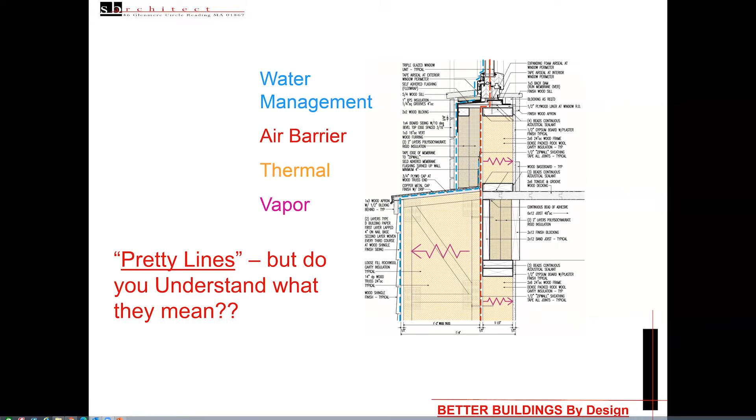You know, this is it. Sometimes there's slides. This one here is, I call it the slider section. It's basically multiple. I use it to have conversations with builders, homeowners, etc. It's a wall section that can be any one of probably 30 different wall sections. It all depends on the different sizes of the framing member, the relationship of permeable cavity insulation to impermeable cavity insulation to exterior rigid insulation.

So this one isn't so much a construction document as it is a learning tool to have that conversation with a builder or with a homeowner to help them get an understanding of where we are, where we want to go, what are our goals here, and more so, how do we make educated decisions about the wall?

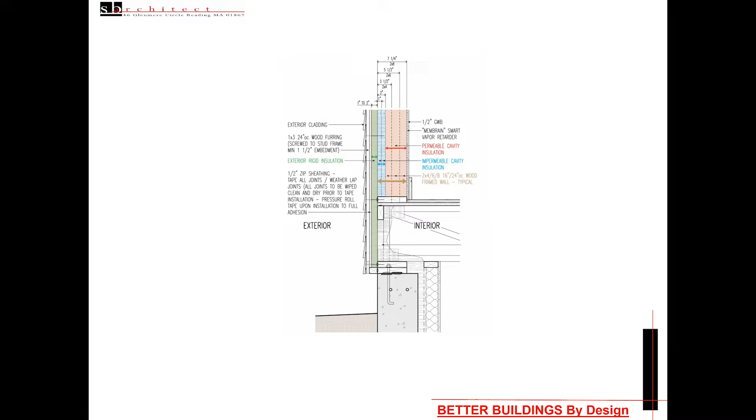A lot of us do remodeling work, right? Whenever I do remodeling work, I never just show where we're going. I think it's extremely important to show where we've been so that we have that mix of old and new and put them together so that people have a really clear understanding of what are we doing here and how are we enhancing or renovating that older version.

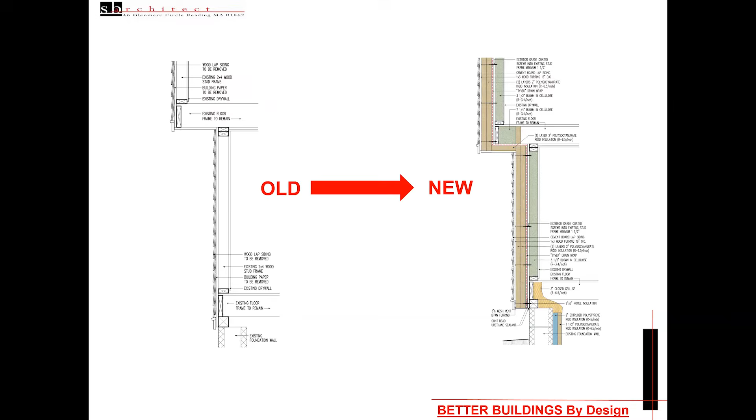When I do construction drawings, it's not uncommon sometimes when the details get too muddy for me to draw what I call a set of twins. And these are exactly the same detail. They're exactly the same project, same roof eave, exactly same condition. It's just on the left, I have what I call the air sealing detail, or the detail that takes everything through the framing stage. And the detail on the right is everything that comes after the framing stage.

So it's really important that the framer gets all the beads of sealant, where the air barrier is, if in fact that's part of the framing scope. But the framer doesn't need to know what the beaded soffit is or the fascia condition or the metal roof. That's stuff that comes after him. So I want him, or her, to be able to concentrate on their scope of work.

And so a lot of times I'll have that detail, and this isn't two details drawn, it's just layer manipulation and freezing different layers so that we get a certain amount of information for this detail, a certain amount of information for the next detail.

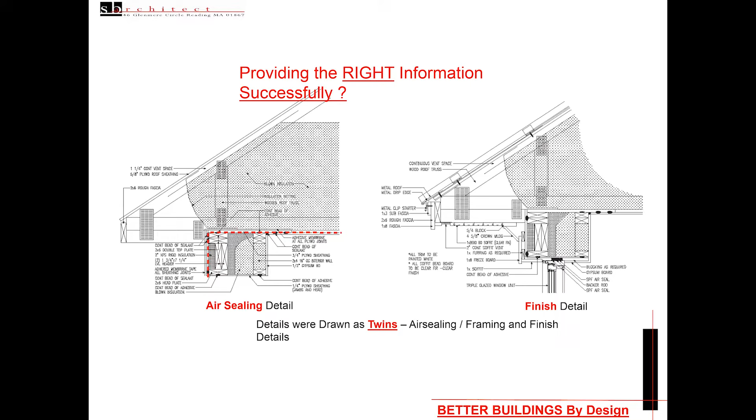And then lastly, this is one that I just did. This is a project. It's a very large house on the coast. I have an inset there of just a really small section of the foundation plan. The footprint was probably close to about 3,500 square feet. But the thing about this house is the elevation had a lot of different wall elevations. It had different door openings. It had grade lines that we had to meet. It had certain footing elevations.

And you can see in the inset here, all of that stuff is in here. I have top of wall, top of footing, all of it, where the step in the footing is. But it's really easy to overlook some of that information. And when you're building a house of this scope, I actually built the foundation in SketchUp. And then I put all of the dimensions.

So you have all the dimensions of different things happening, like grade to top of foundation wall. All the blue elevations mark either the top of the wall, top of footing, bottom of footing. The numbers in green delineate what the grade elevation is at any of the corners. And so I call these a foundation cheat sheet. And the builder was extremely happy to get these.

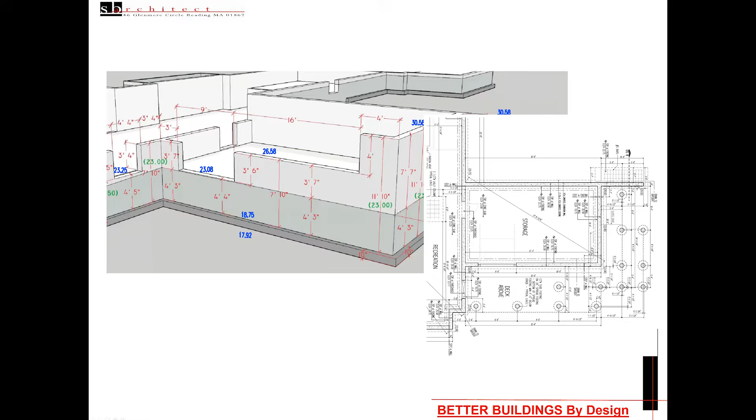Okay, so I kind of took the process through, going more in general through the whole process and the details that I want to convey on the job site. One of the things that I always told my clients is that the plans are not drawn for them, even though they pay me, but it's basically more for the subs. They're the ones who need to understand how to build a house. To me, that is just critical. Also, I've always said that if the critical details to frame a house or to build a house are not on the drawings, the chances of doing it right are greatly diminished.

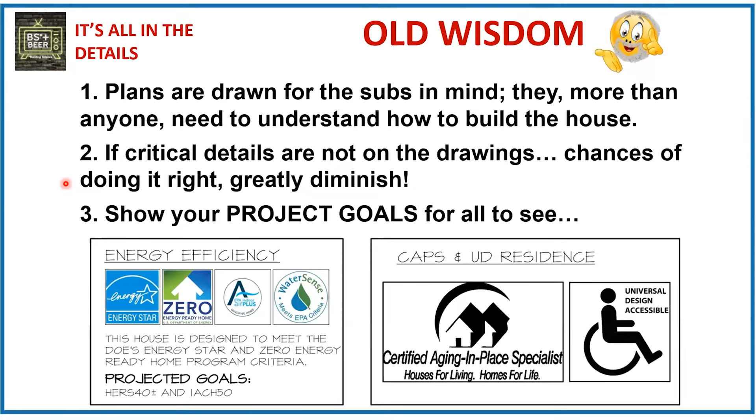And I like to show my project goals on the first page of the plans, because that way it puts everybody on notice. This is what we're trying to do. This is what we want to do. One of the things that really bothers me a lot in our industry is that people don't have a clue about codes. I've already ordered my 21 code, I think it's in the mail, but I've seen the presentations that ICC's done, and there's quite a bit of changes. So for those people that don't know what's coming, there's quite a bit of changes happening in the building envelope and the mandatory requirements.

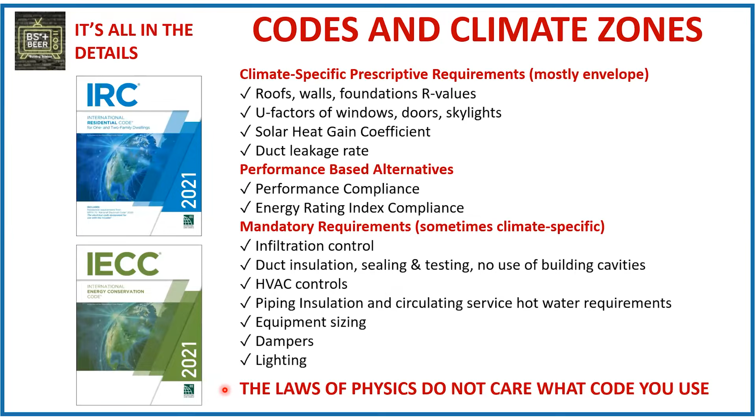The one thing that I've always complained about the codes is that the laws of physics do not care what code you use. And unfortunately, a lot of people use the performance codes to cheat. This was something that I learned from Joe 25 years ago and never forgot. I design homes in climate zones 2 to 5. I believe that if we're going to call ourselves professionals, we need to know how to do dew point analysis on all our projects. You can use ASHRAE fundamentals, which is pretty simple. This is an Excel sheet that I created many years ago, and I use it. But you can also use DOE's program. You can use WUFI.

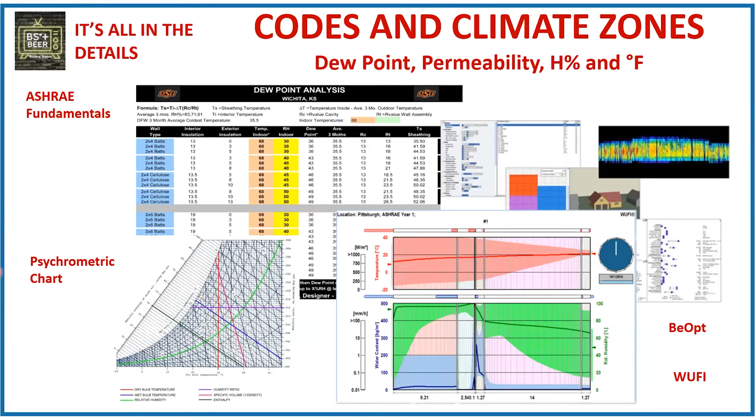At the end of the day, people don't understand that even the codes tell us, look at chapter 7 or chapter 8, and it'll tell you how much insulation you need to use. Well, it doesn't tell you that the house settings may be at a higher temperature or higher humidity. So you're kind of screwed if you're not designing prepared for that. Here in Texas, it tells us to base our work on a temperature of 68 degrees in the wintertime. But most houses that I go to, people have their temperature in the wintertime at 72 or 74. I'm sure that happens in many other areas. So people really need to know that.

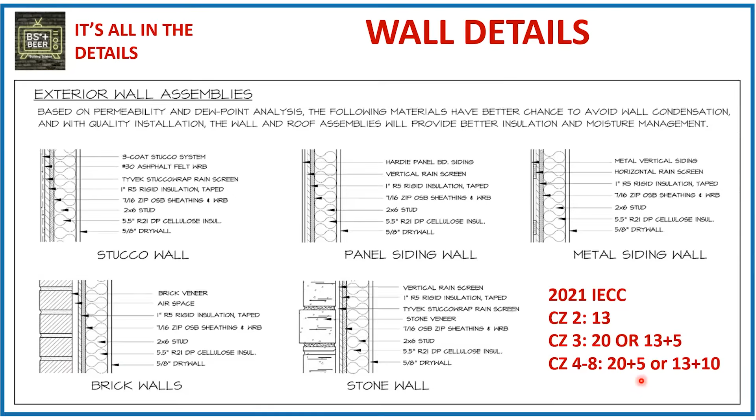Based on that, for every single house, I put a detail of each wall assembly. This is a typical wall assembly I do in climate zone 3, which is more than what is really required in our climate zone. But I know that every 7 or 8 years, we're going to have climate like what we have today for a week or two, where our temperatures are below freezing. So I'd rather protect my clients through that. And in climate zones 4 to 8, they've now improved the code, especially in 4 and 5. Same thing goes for the roof assemblies.

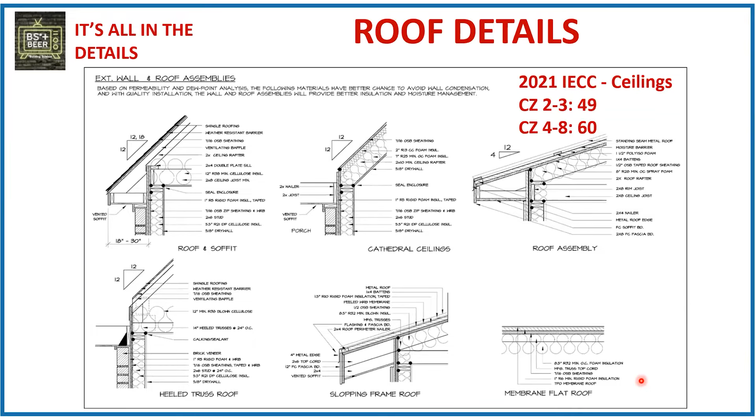And for us, R49 is going to be a step up, because there's still people doing R20. As you guys well know, many people are using the performance code to put 5 inches of open cell foam on a conditioned attic, and that is going to be way below code, 40%. I don't think I want to risk my clients with that type of performance.

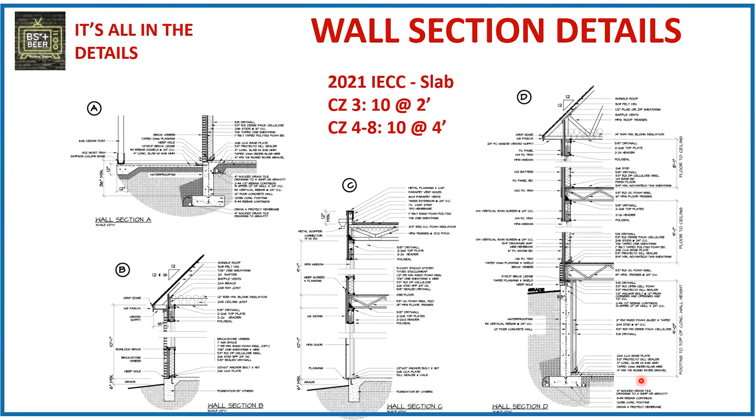And then same thing, it goes to foundations. We don't do a lot of basements here in Texas. Just a few, but right now I'm doing a house in Illinois, another one in Missouri, and I'm getting ready to start one in Michigan. So these are things that if you design in different climate zones, you better learn how to figure out not only the code, but how to do all your dew point analysis and so forth.

Same thing now, unfortunately, as you guys well know, in the 2021 code, all the climate zones 1 through 8 are requiring 5 air exchanges at 50 pascals. And I think that's sad. I've always felt like if you're a builder and you can't get 3 air exchanges at 50 pascals, you need to go and do something else, because you can get that fairly easy. But I guess nobody pays me for my opinions.

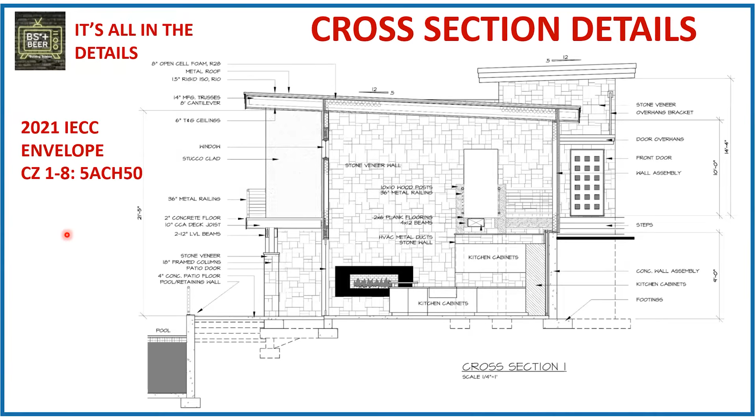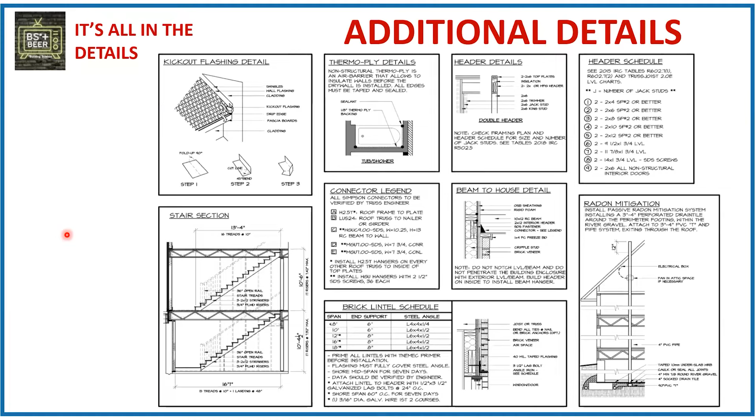And then we always try to include different details that are pertinent to that particular plan. I don't want to flood the plan with details, because then you scare away a bunch of subs. But there's some that are very important to me. As a high performance house, we need to know how to install windows properly.

And so I'll have a detail for stucco walls, another one for brick or stone, and another one for siding. And sometimes we'll have one for panel siding. Sometimes we'll have one for clapboard siding. And so I just think that you need to show the subs the steps to do things right.

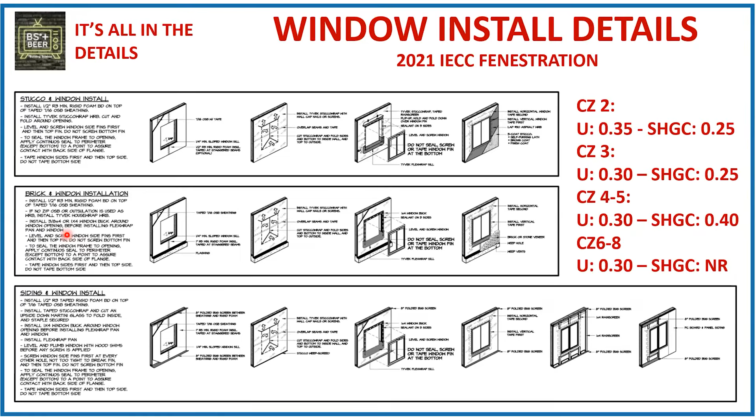And as a high performance house, HVAC to me is the second most critical thing after building envelope, and it really never gets done right. As you guys well know, 3 months ago I made another presentation, and I showed that it took the largest HVAC company in the Dallas-Fort Worth Metroplex 4 times to finally get it right. And so it's something that we have to deal with.

And unfortunately, the HVAC industry is not too keen on making sure that their members are educated. And of course, in our building industry, most people don't have a clue. And so I have to get involved, making sure that my trusses are designed with the chases. I'll make sure that everything lines up. I'll make sure that the manuals are done correctly and so forth.

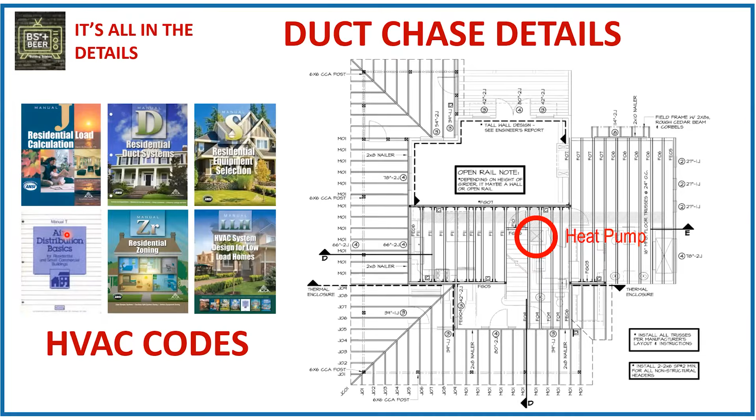Same thing. This is a detail I showed 3 months ago. Single story house. I got the furr-downs. I even had the detail for the furr-down, and yet still they designed 3 times all the ducts in a ventilated attic. So how that happens, I have no clue, but it's really frustrating.

And that furr-down looks mighty familiar. Just saying. Sure. I've just been doing it for 20 years. So I probably learned that from you or Joe or Betsy. Wow.

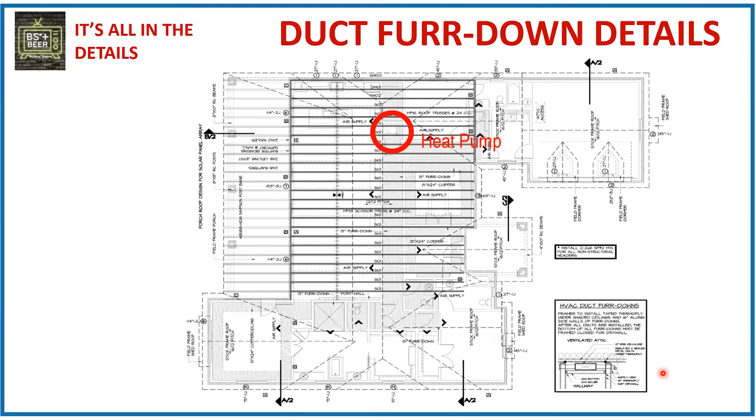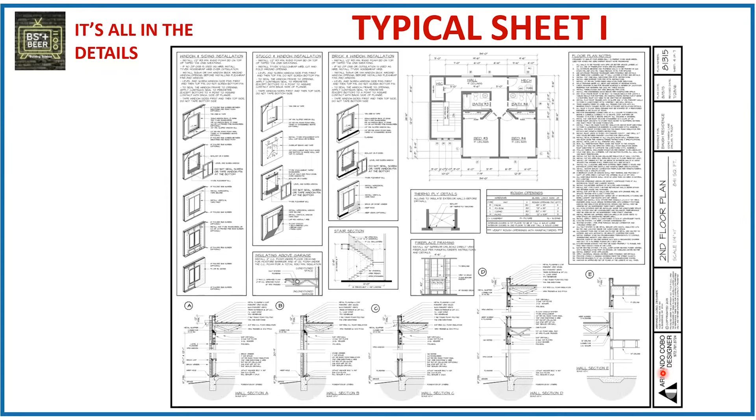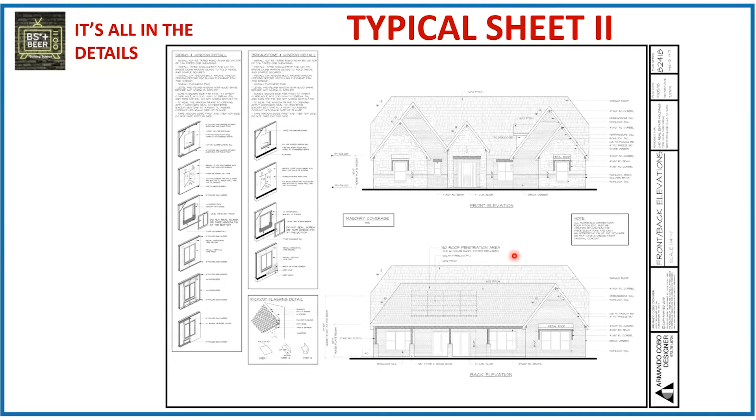So, this is a typical sheet of mine. I put details in there and some instructions on how to get things done correctly. And then on elevations, we do the same thing. I'll include the details of the windows and the siding, how it needs to be installed. We put where the solar panels go. We make sure that there's no penetrations in that area on the roof. And so it's about teaching people how to do things so that the next guy that comes after them shouldn't have much of a problem.

And then here's the one thing that I just don't get. We keep building the same house in the same place year after year after year. What I found out is that it costs between 0.5% to about 1 or 1.5% to take a house and design it going from EF1 to an EF3. And so why not?

Same thing, like Houston. They started building houses in Houston 200 years ago, and it floods every year. And they keep building the same house in the same place year after year after year. I'm sure everywhere else around the coast, they do the same thing. So at some point, I really think that code needs to look at making sure that resilience is part of the code.

And I know it's supposed to come up on the next cycle or two, but let's just hope it does. And then lastly, I've been preaching about this for 10 or 12 years: all the work we're doing, and yet builders and homeowners are not getting the full benefit of the work we're doing. Why? Because builders are not putting custom homes in the MLS system, because the comparables are not there.

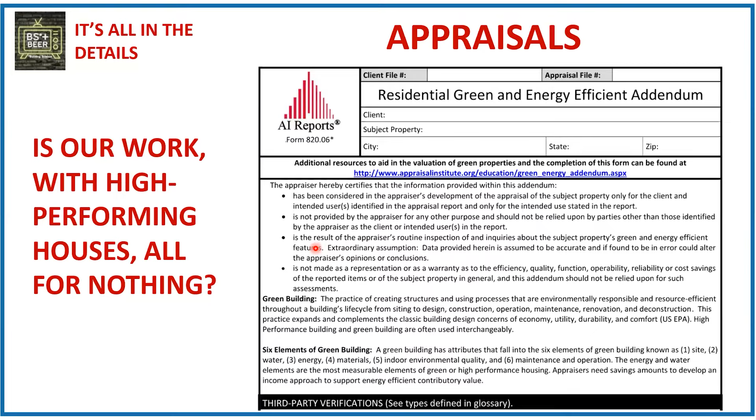But we're leaving about 10% on the table just because we're not following through, and just because appraisers are not doing what they're supposed to. So these are my key elements of this talk, and I hope you guys agree with me.

Armando, thank you for that 2-slide presentation. Well, you made it 4, and Armando didn't listen to Kylie either. So just saying. What did he complain about? I didn't. I was just telling you, wonderful presentation. Thank you, Armando. Thank you.

You're welcome. So Barry, would you like to show anything? And if you don't want to show anything, would you like to say something about Steve or Armando's drawings? I'll show something. I just pulled a couple sheets from some different sets, which are very straight up. Some of them are what I've done over the last few years, and some are things I'm experimenting with to test the waters with how I talk to different builders about high performance stuff. But I want to make 2 comments. Maybe we'll come back to it.

Steve, I thought your slider sketch was really interesting. Thank you. And I have some thoughts about that, something that's maybe not going to interest a lot of people. But when we're on the front end of a project and we're talking to a client about their performance goals, you're trying to design defensively, like you start maybe with a 2x6 core, and you start building in both directions based on performance goals. And there's cost associated with how far you go, how much continuous insulation, and then you get into higher performance windows and all that. But at the same time, you're trying to design a house defensively.

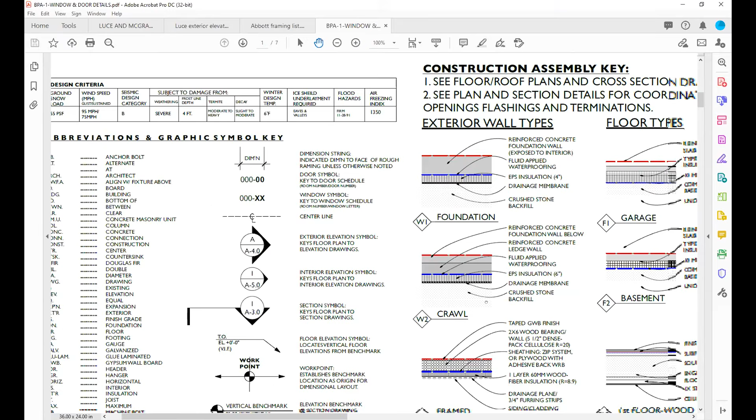So I'm going to start with the general and go to the specific. This is a pretty typical cover sheet where, like Armando, I've got all my assemblies and all my enclosure types called out in the middle bottom there. So whether it's an exterior wall type, a roof type, a floor type, I'll start assembling those even during the design development phase. So I understand if I've got too many enclosure types going on, that may be a problem, and I need to start pulling things back. Next slide. I'm not going to dwell on these too much.

The other thing I like to do is I work in an integrated 2D, 3D. I work in Vectorworks, and I like to break the whole thing down, draw the concrete, draw the framing, really do all my coordination, because in a perfect world, if you get everything coordinated in 3D, you don't have to produce as many drawings. I found when I used to draw by hand, half the drawings I was doing were just to make sure I was finding all the problems on paper so we wouldn't find them in the field. So I do a fair amount of breaking things down in this way. Next slide.

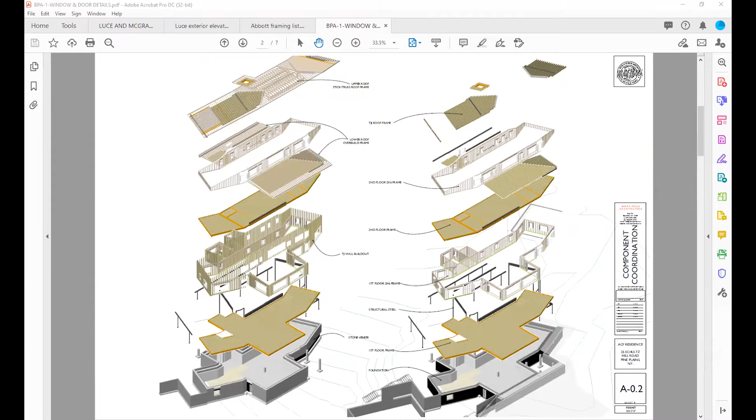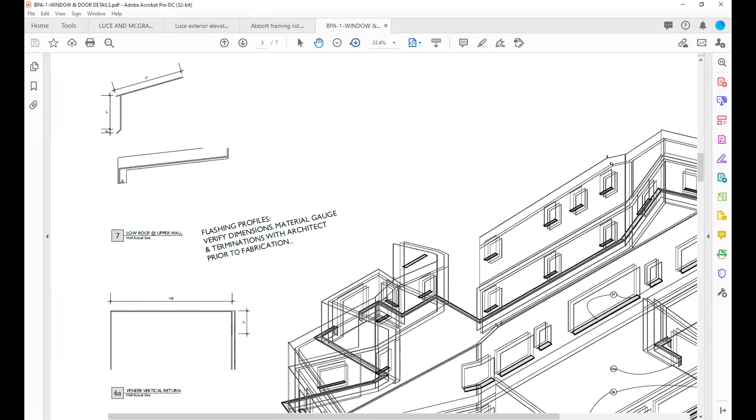One of the things that I'll do just to make the scope clear on more complicated houses, like this is a diagram for one house of just the flashing scope, just all the copper that went into a house that had a stone veneer base and had copper windowsill profiles and drip caps. Maybe the profiles would have gotten modified slightly by the time we went to install them. But in a pricing set, I want to be sure that this scope is absolutely clear, so I don't have somebody saying, "Oh, I didn't realize you wanted that to be metal." So I tend to go through and really isolate all these elements as I go.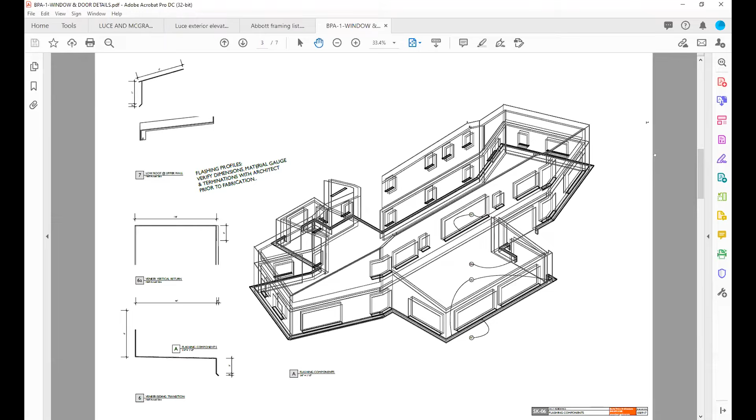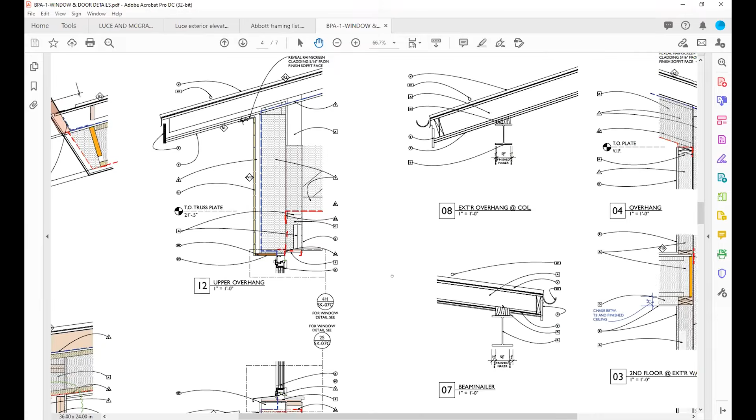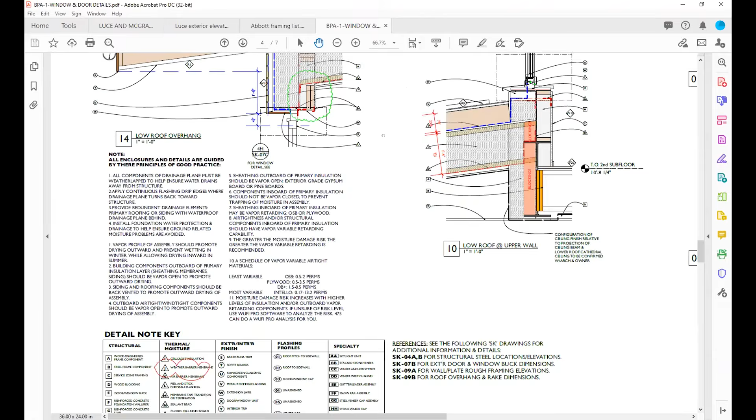Next one. This is a pretty typical detail sheet. This is from a passive house from a couple years ago, and my details have evolved since that point. But the way I look at it, you want to establish all your enclosure types so you have a uniform system. So right in one of these drawings, you can see reference to the enclosure type, the overhang, the wall, and that'll refer back to pretty typical details. Then details in the end really should just be about how transitions occur, where a floor meets a wall, where a wall meets a roof. So you can go through and find all those things and draw them. But these are pretty conventional drawings. So if you go to the next slide, Mike, I'll talk about the things I'm starting to play around with.

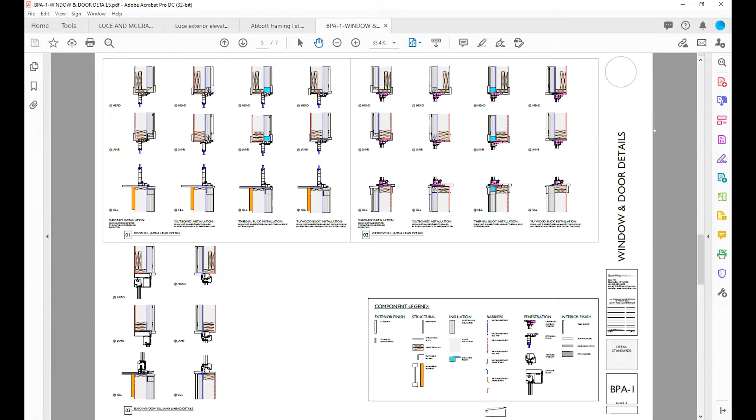So recently I had a couple jobs. They all were at about the same point where I had intentions about how I wanted to install doors and windows. These are all the same assembly. These are all 2x6 with a 60 millimeter Gutex continuous insulation on the outside. And I know of at least 4 ways to install a window.

Go to the right to the windows rather than the doors, if you don't mind. So what I did here is I made a menu sheet with, starting on the left, an exterior wood buck. Then I have, I'm trying to remember what they are. Can you slide down a little so I can see my titles? Sorry about that. Oh, that's okay.

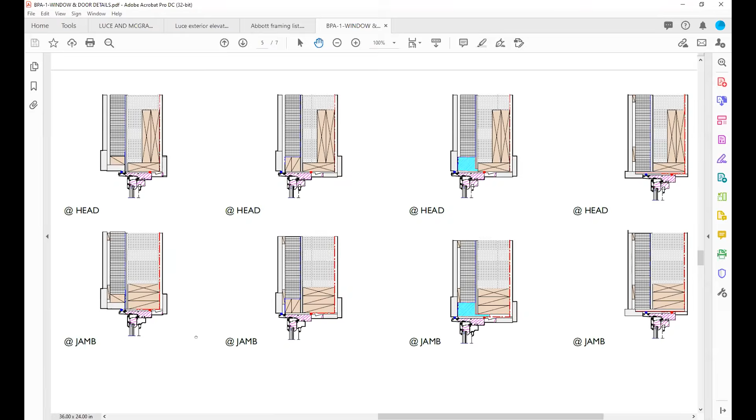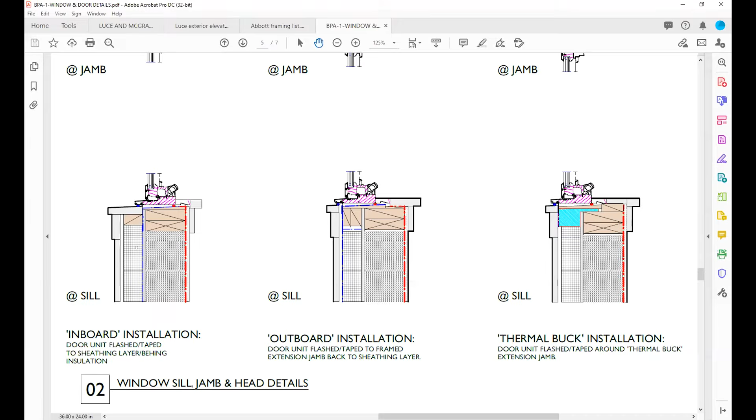All right. So yeah, on the left, I've got inboard installation. So I've got my WRB on the back side of my Gutex, and that affects how the window might get installed. The window's pushed further back into the assembly. The next one is an outboard installation. The next one is using a thermal buck, which a lot of you might be familiar with. It's a product right off the shelf. It's got some foam in it, but it makes for a really nice, very low thermal bridging value. And then the last one would be a plywood buck installation.

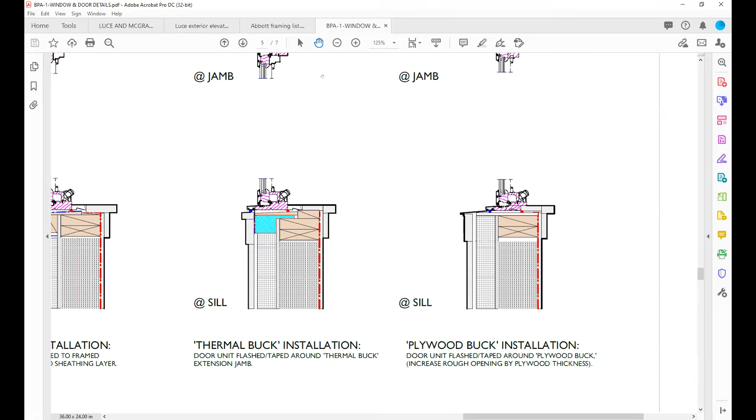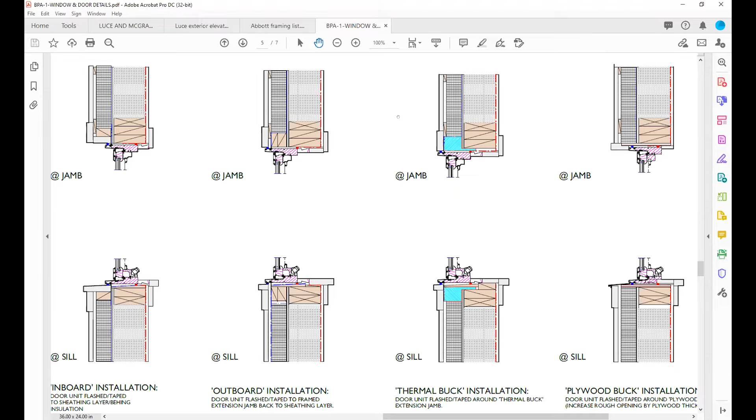So I made this for myself to have a detail library, but I also use it to send to my builders to say, let's have a discussion about how we want to install these windows. It may be that they had a certain installation approach in the pricing set based on what I had shown, but I like to be able to talk through it because different builders have different comfort levels with certain approaches. At the same time, I don't have it here, but we did some thermal analysis to really understand the implications of all these details. What I like about this is it made for some pretty interesting discussions about getting ahead of some of the problems with installing doors and windows.

These are all shown with more of an American nailing flange profile, and then on the bottom left, I started to foray into European profiles. So this is the kind of stuff I do just to expand my library and my vocabulary for being able to discuss options. You can go to the next one.

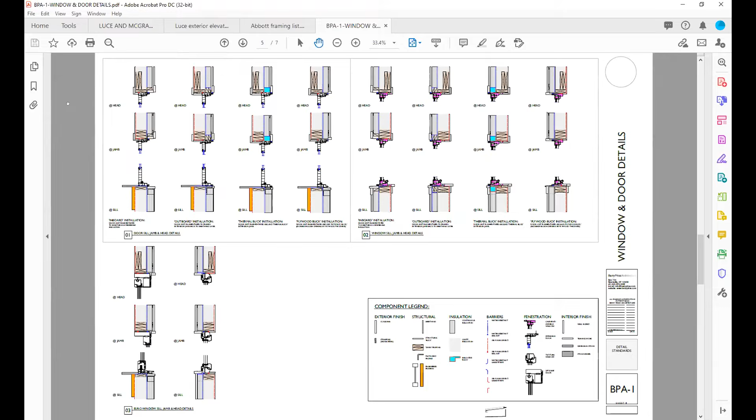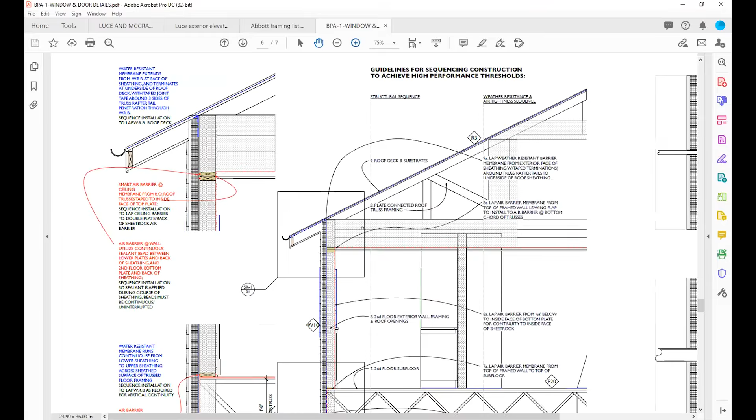And then lastly, I'm working with a builder who's really enthusiastic about doing a high performance house, but really hasn't done one before. As an architect, we have to be pretty careful about the difference between how to do something and what something is supposed to be. But what I've learned, certainly in terms of high performance, sequence is really important. So I made these summary sheets, where I'm literally coding the notes in blue and red in terms of whether it's a weather barrier or an air barrier, but I'm also starting to say, okay, you're at the foundation now, you're getting ready to set the floor framing, this is how you're going to air seal here.

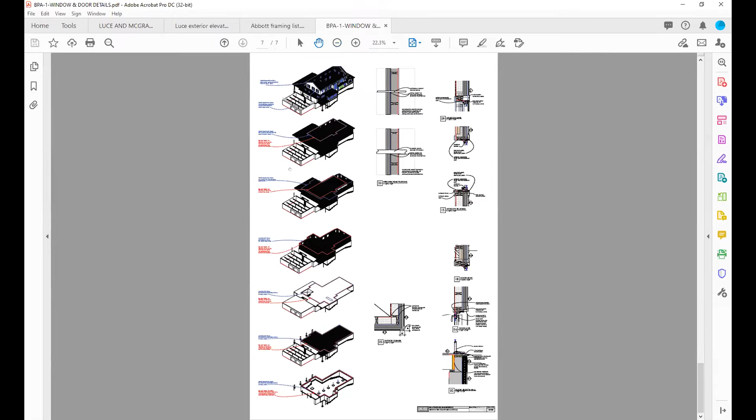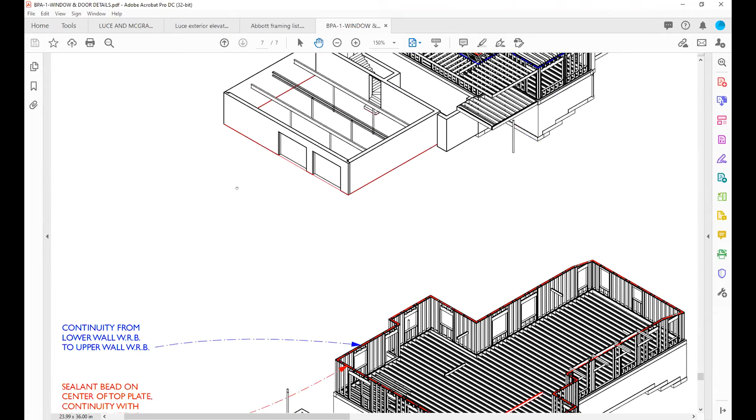So if you go to the next drawing, I did a 3D version where, at the bottom, you'll start with the foundation, and you'll see I'm taking the red and blue lines that we're accustomed to seeing in our details, and applying them as I go through the sequence of the building, starting with the foundation, then the floor system, and working our way up to the roof. So I'm giving him a cheat sheet to know this is critical. I can't be there every day. I'm going to go there as much as I can, but I'm doing what I can to be very upfront about the stuff that he needs to be aware of to get these transitions done properly.

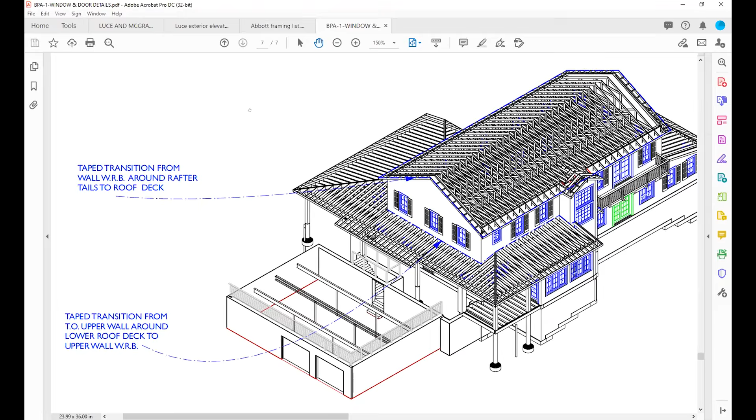So my point here is I'm not saying that these are great or that they're completely workable, but these are things that I'm experimenting with, like Steve said, to get up on the roof and talk to a framer and say, so what was good, what was bad about that drawing? I'm throwing these out and seeing if they stick. Penetration details, all the things that you want to be sure people understand to get this right. That's all I got.

Oh, that's awesome. So, Barry, your approach reminds me of when I was a kid. I loved playing with Legos. I bet most of us did, and because I didn't go through a proper architectural education, I always think about Lego instructions as the gold standard of how you teach somebody who's like 4 years old how to build something. And I feel like you've got it nailed down. You have the Lego assembly approach.

Yeah, in the chat box, Miguel just said we print out the CDs on a 3D printer with full color spectrum too, right? So they just print out Barry's drawing, assemble. Oh, this is how this goes together. Okay, good.

I think they're probably more complicated than they need to be, but a lot of times you draw stuff, you try them out, and then you learn from it, and you go back and see what really works. That's a great question. I was going to say, it came up in the chat box. Is there such a thing as too much information?

Yeah, there is. I think I saw early on in the chat box there was a question about isolating specifications into separate booklets, which I used to do, as opposed to having them integrated into the set. You can really sort of intimidate, or in the end, you just really want to strip it down to exactly what they need.

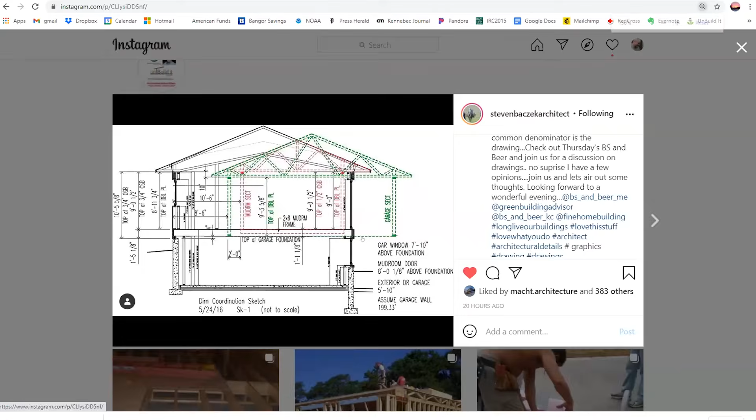Well, as an architect, it's real easy for me to grab 3 different building sections. I just changed the color on 2, and then I superimposed them. So now we know the relationships of fascia, mud sill, and floor to the other sections of the house real easy, right? So you can see there's red lines, green lines, and black lines. The black line was the main house, but he was questioning how these other roof lines and ceiling heights relate to that.

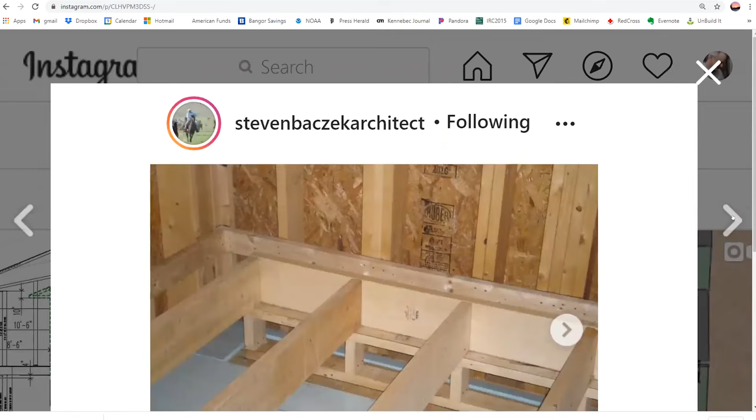And so a lot of times stuff like this doesn't make it into the drawings, but it's really easy for us as architects to, I could do a drawing like that in literally about 5 minutes. That probably takes 2 or 3 hours of head scratching out of the builder. And not only that, but puts him in a position to be successful, right? Because he understands those relationships now. And he doesn't have to sift through 4 different building sections and try and guess where things are different, because we have the ability to superimpose them.

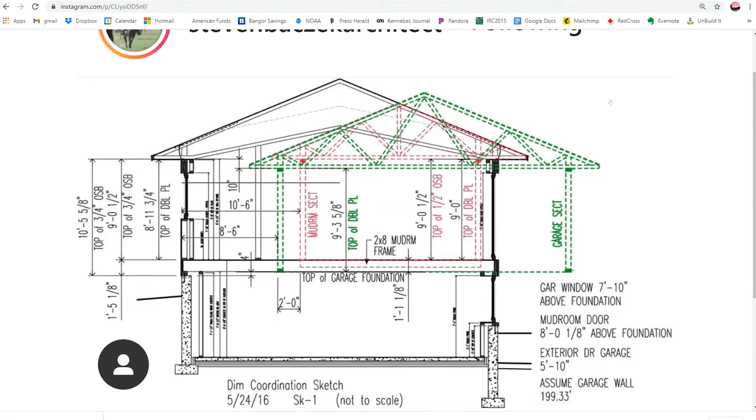I think it becomes this game of respect that you have to have enough respect with the builders for them to ask you the questions that need to be asked. And you certainly have to respect them and give them the answers, but you have to be respectful of their time, their efforts and such, not to overburden them with information or hide things. I've actually been with architects that say, the builder, he can figure that out. No, that's not his job.

It's our job. I tell everybody I work with, the drawings represent one way to do it, right? If we want to change that or alter something, I'm totally up for that. Let's have the conversation. But the drawings offer one way to build that house. As a builder, I very much appreciate that.

And I think that in the age of liability, one of the most important things that I do is do what I'm told. If you give me directions to follow, if you show me where the target is, I can hit it. If you give me a vanilla set of prints that doesn't have a lot of details, I can also fill in the blanks and do what I think is best. And since it's my liability, usually that's what I want to do a lot of the time anyhow.

But at least if you show me what you want, I can call you and say, Steve, I see this detail here. You want me to do it this way? I usually do it that way. Is there a reason? And we can have the conversation. But by leaving it up to the builder in a vague set of drawings, you're sharing that liability because it's not really called out. And now everyone's kind of hosed.